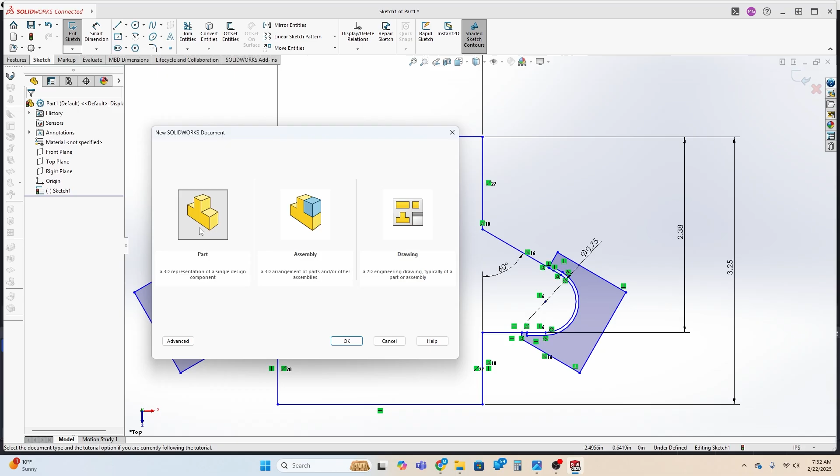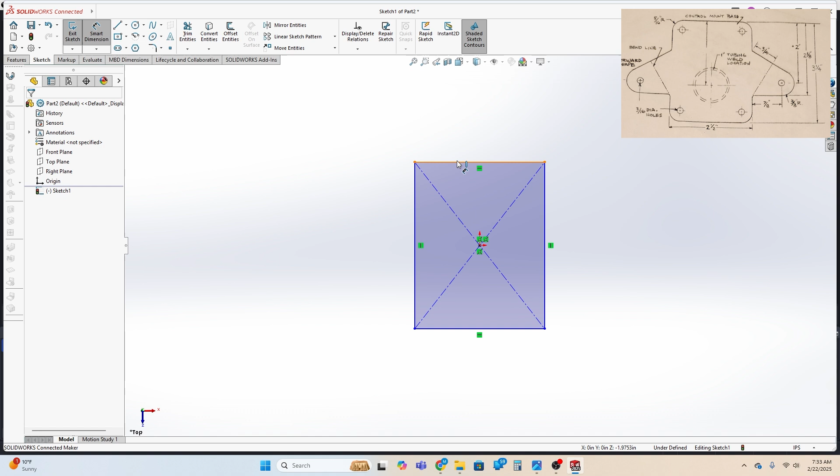A lot of cool stuff going on. You're going to see me dig into some of the back-end stuff that's not direct construction. This is SolidWorks, very cheap for builders, and in my case I qualify because I'm not using it for commercial purposes. I'm building the control mount assembly for the flight stick, for the actual control stick. This is kind of important right now because while the skins are off, it's easier to access where this is going to mount to the spar section of the aircraft, and part of that's going to go through the frame on the fuselage.

So to simplify my life a little bit, I wanted to get this done first. You would have seen videos of this before, except I've been learning how to use SolidWorks for the last 2 or 3 months. I've done a bunch of various brackets of varying sizes and whatnot. You can see some pictures throughout.

But this is the big one we're doing. Basically, it's just starting with a flat sketched image, then building the elements that matter. You can see that square right smack dab in the middle, the circle is going to be out, and I've got blown up on the top right of the screen the drawing that came with the blueprints I'm basing everything off of.

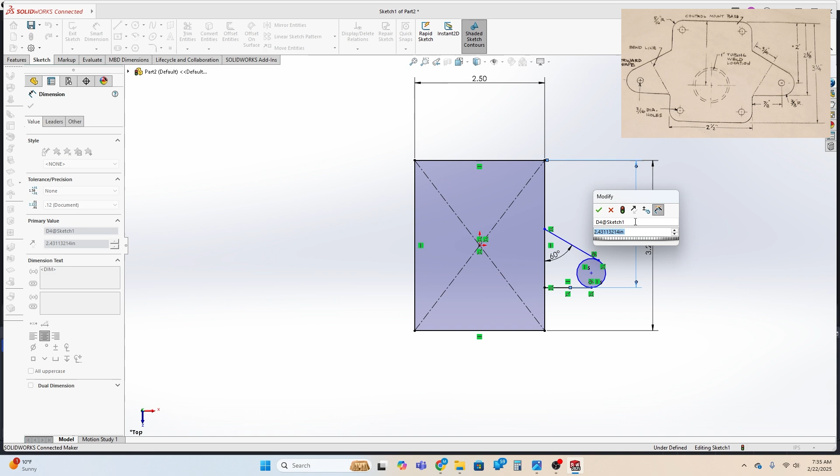So from there, you're seeing me do all the drawing and modifications that go with that. That device I'm using there is basically a measurement tool for dimensioning. It lets me put very accurate dimensions on parts to make sure everything's going where it's supposed to be, angled where it's supposed to be, mounted where it's supposed to be.

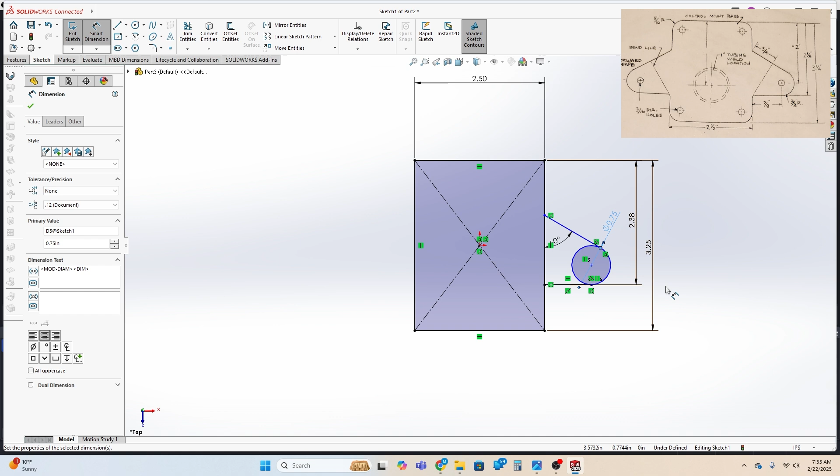It helps define the drawing very specifically so that when I put it into 3 dimensions, it's going to be very accurate with no errors, especially because once this diagram is done, I'm sending it off to Send Cut Send to have them cut the brackets for me. I'm not going to mess with it. I've technically already made some of these brackets, but I'm redoing everything in SolidWorks and sending it off to Send Cut Send because the quality is going to be infinitely better.

They have a precision brake built for what needs to be done in this situation. Since that's the case, it makes more sense to have them do that work versus me trying to do it on a 10-ton piston ram, jury-rigging a brake out of it and hoping it's all going to be accurate and precise, and that I'm not going to end up destroying my parts once I put them in there.

I don't have the ability to easily heat up joints to make sure they're soft enough to make the curves, especially with the 4130 chromoly steel plate I'm using. I don't want to mess with that when I don't have to. These services exist so I don't have to sit there with a grinder and a cutoff wheel trying to be an artist with a material I'm not very familiar with. I'm already trying to learn how to weld on this thing. Let's not reinvent the wheel if we don't absolutely have to.

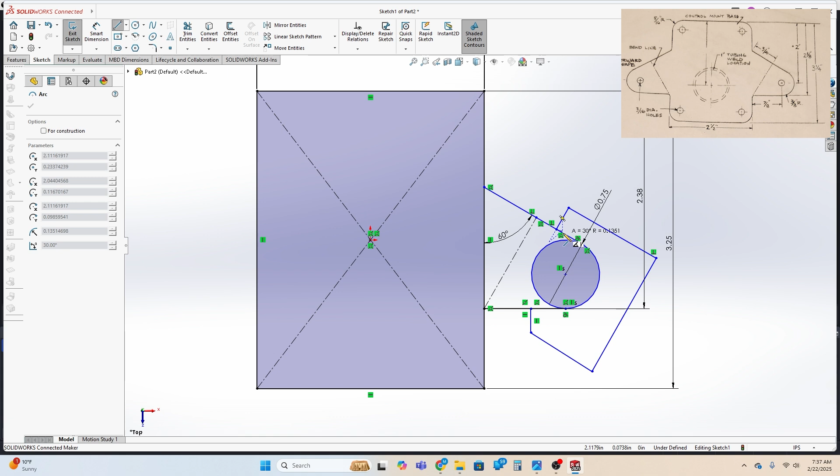This other piece here is something I figured out after I'd already drawn this part once and tried to submit it. This is a tab, so when you're actually bending on it, they need more material to bend on. They said it needs to be at least 1 inch long and parallel to the direction of the bend. That dotted line you see going up at about 30 degrees from north, that's our bend point, or pretty close to where it's going to be. So I needed to extend that tab 1 inch wide and far enough out. Then you'll see me draw in little connection points - they're break-offs for the tab.

Once this is done, I will cut off those tabs, remove the entire piece, and grind it down so they're smooth and flush, making sure they're nice and won't cause any issues. I just remove the tab after the fact once it's actually delivered. Super easy process to do.

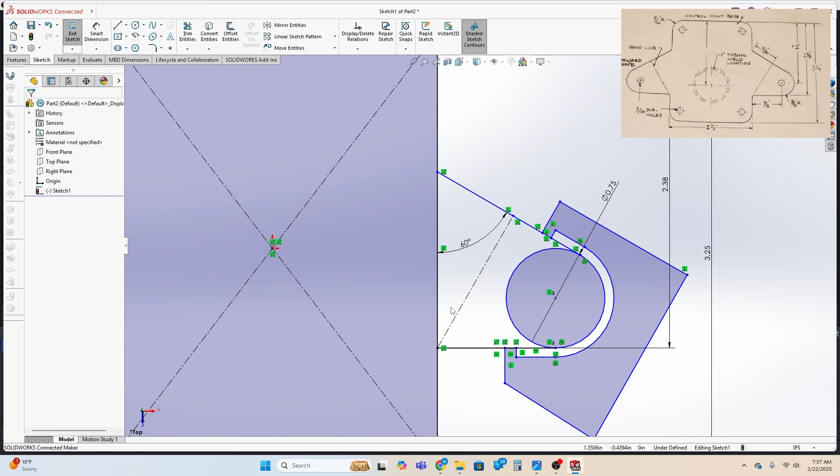That came from Send Cut Send, that I had to do it that way. I wish I didn't have to, but there's going to be a couple areas that will need a little attention when this is done, but not the end of the world whatsoever. So that's that segment right there.

From there, I just need to add the extra dimensions for the bends to make sure this thing's going to be accurate. Once this becomes a 3D model, we need to be able to bend it to the proper shapes too, and all that's going to get done in SolidWorks. By the end of this part, you'll see that happening.

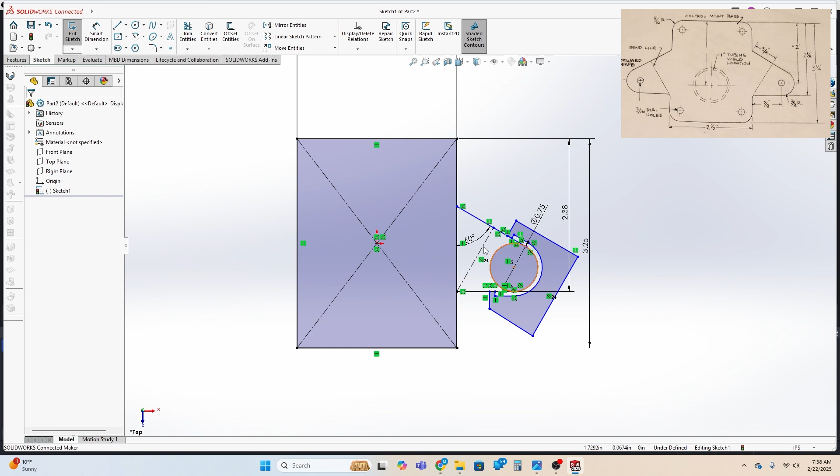So that's kind of how this whole process works. This whole thing has been dimensioned basically to this point. Now I just need to duplicate it on the left side, because you can see from the drawing it's supposed to be identical and symmetrical on the other side.

So I need to draw this center line point, that dotted dashed line going top to bottom that I just added. That's our mirror point, dead center on the bracket, and we hit mirror on that.

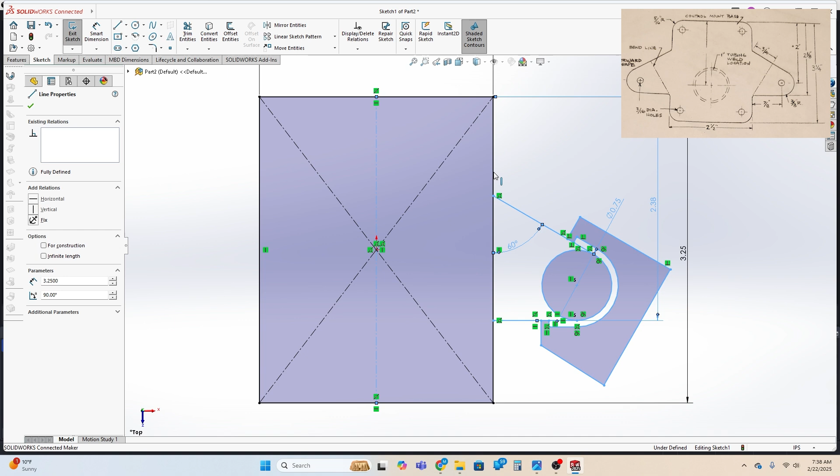Once all the right components are selected—and I'm working on that right now, there's a ton of objects in here which can kind of cause some issues, and that's where I'm messing with that too right now—it mirrors it over just like that.

In order to make this one solid flat drawing, I've got to do exactly what I did there and remove all that, and then I need to remove the tab components as well here. You're going to see me zoom in here in a moment, because unfortunately right now it is not a single solid entity. I need to go in and actually get close to those tabs and remove those.

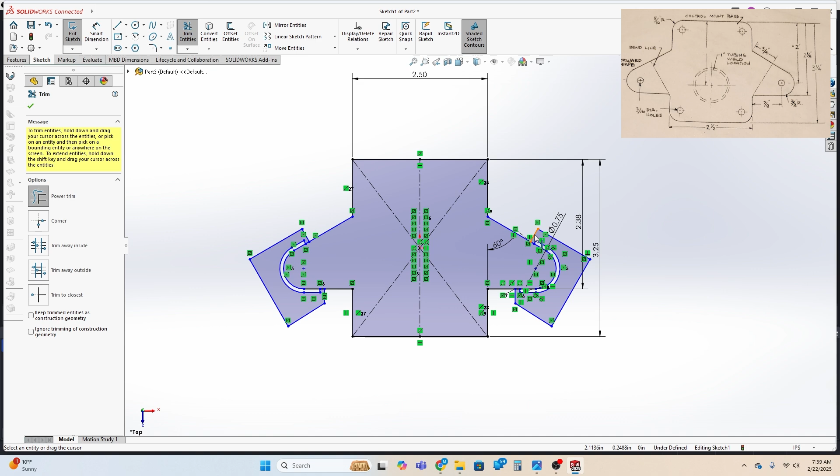Right there, you see me doing it—or trying to. I need to get a little closer because they're small tabs. But once those are all out, boom, you now see the solid geometry, and from here I can actually go to the sheet metal tool.

Oh, before I get to the sheet metal tool, that's right, I drew the circles out here. Those are going to be the actual screw holes for everything else for the mounting. That's going to be what actually mounts the control arms to those two little brackets. There's going to be control lines attached to that stuff.

The holes that I'm drilling right there are going to be for the physical mount to the spar. Once those are dimensioned and taken out, that'll get mounted directly to the spar. I'm drawing them now because when I make this thing in 3D and turn it into sheet metal, it'll actually remove those segments, so it simplifies that.

Each of those is 0.187. I think it's 3/16 of an inch. They're all 3/16 inch holes.

You see me having to dimension decimally. I wish there was a way to do it with fractions, but if there is, I don't know what it is, so I have to learn the numbers. I've memorized some of them, but usually I have to break out the old calculator to make sure they're all square and proper.

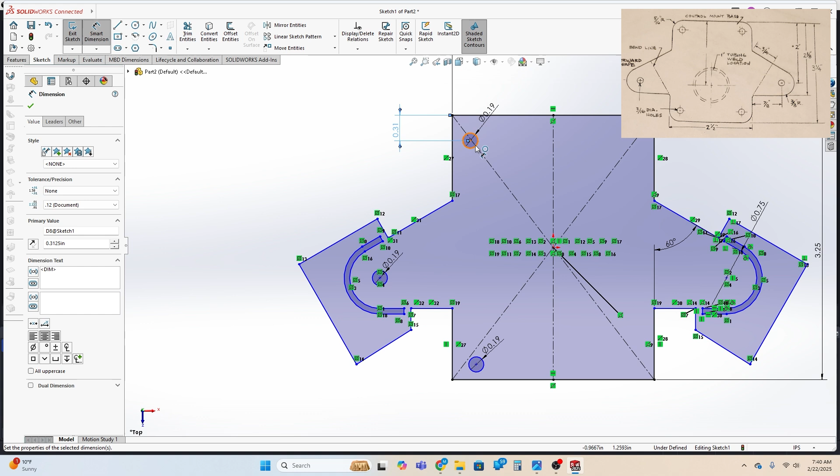Once all three of those are drawn out, we'll do the same thing we did when we copied the geometry from the right to the left. We'll copy the locations and holes from the left to the right using that exact same mirror function in SolidWorks. As you can see, this is very precise, but the nice thing about that dimensioning tool is you can get this stuff very, very accurate, so you don't have to worry about any guessing games. When these get cut...

Because Send Cut Send is a laser cutting service—beats the heck out of me with a hand grinder—they're going to be very, very accurate. So there you can see that with that mirror function, it duplicated those circles exactly where we needed them to go.

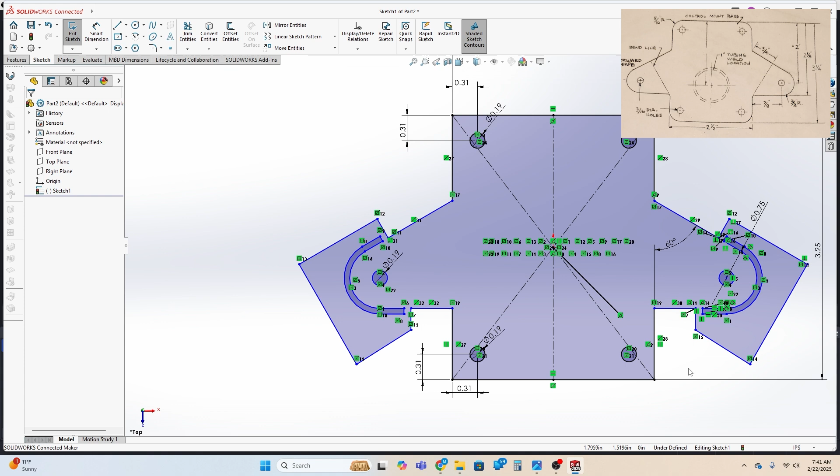So part of this is just checking to make sure everything looks good, and the whole solid is selected the way it needs to be. From there, I use the sheet metal tool and make it the thickness I want. In this case, it was supposed to be about 0.12 something.

The next closest size was 0.125 thick chromoly steel. So that's it right there, getting the dimension set, and there is the flattened laser cut part. That's what it's going to look like initially, before the bends get put into place. Before I can put the actual bends in, I need to do a couple more features on this.

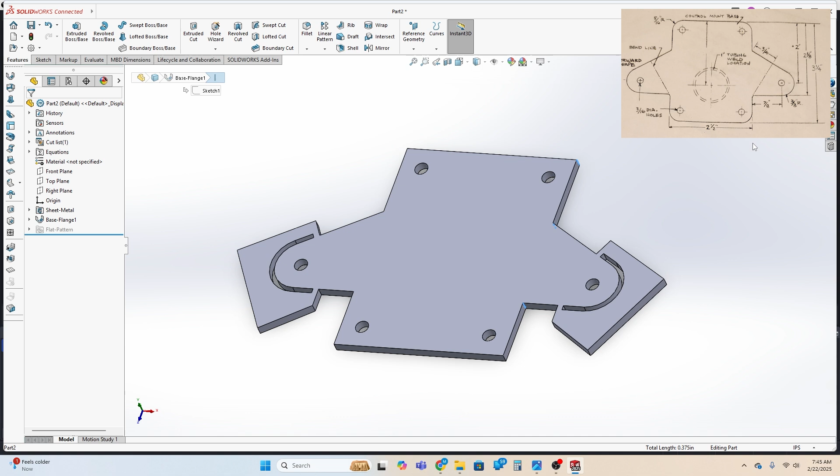As you can see in the drawing, there's curved corners as opposed to sharp angled points. We're going to address that here. So you can see me selecting each of those corners, and then I'll put a fillet in and add those arcs. Those are a little small for that drawing, so you'll see me go in and change the radius on these momentarily.

That should be happening right there. I'm just extending those radiuses a little bit, smoothing them out, cleaning them up, along with the interior radiuses. This is also going to make life on the bend itself a little easier, because it's actually going to extend the bend a bit into those tabbed wings as opposed to putting it right against the corner.

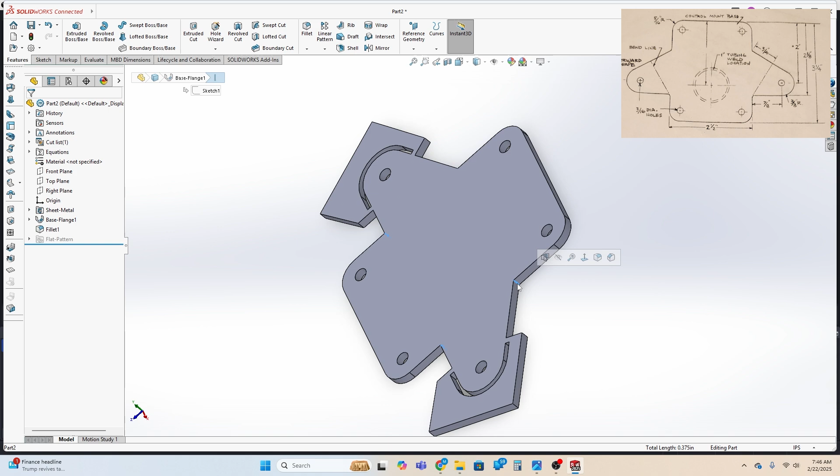If I did it right against the corner, there were going to be issues with deflection from the rest of the part, because it would be in the way and there'd be no good way to make that bend right into that corner. So once I get these fillets done to the right size, since these are supposed to be about 1/8 inch fillets...

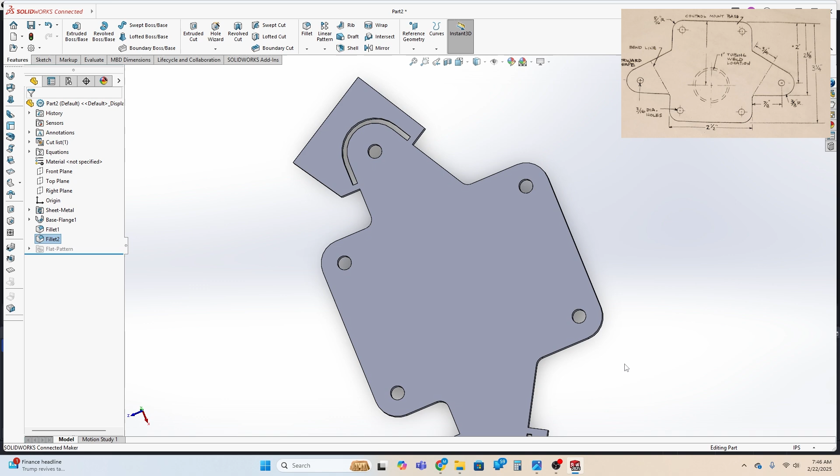That'll shrink that up, and then you'll be able to see where I put my perpendicular lines when I move back onto the flat face. So far this is the gist of what you're looking at - you're seeing the bend portions. Now we're just switching back to that top view so we can draw back on that face.

So we'll go back to sketch mode, click on that face, and start grabbing some corners to draw the bend lines. We're not going to use the very corner, we're going to use that slight offset right at the edge of the curve there. That's going to be our best bet for getting that.

So we just push it, and those yellow lines that light up when I brought it up to the perpendicular show exactly where that perpendicular is. So I stick that point right there, and that's where those lines are now drawn on this topmost face.

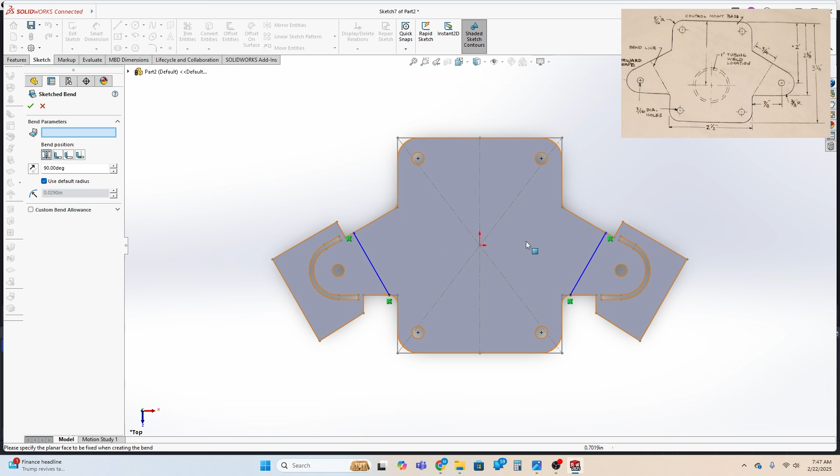From there, I go back to the sheet metal tools, and here I can select those bend marks - which is exactly what those are - and put the appropriate bend location on it. There's a holographic see-through image of what that bend's going to look like once it's done. At this point, that's pretty much exactly where I want it to go.

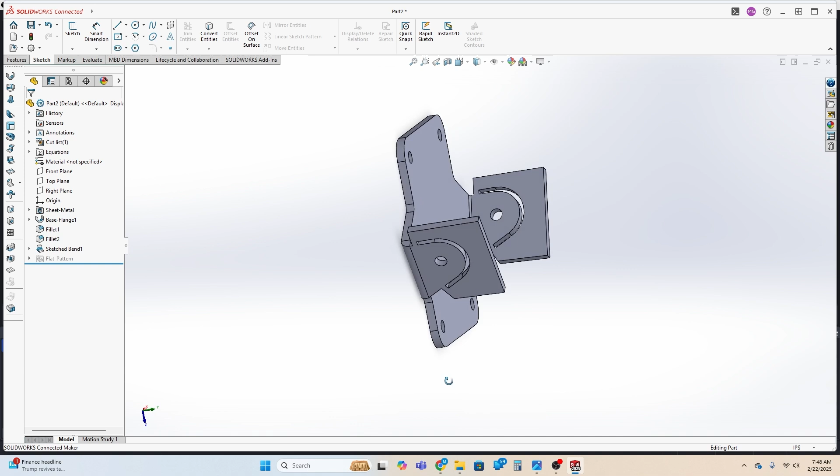Now all I have to do is select it and make it a permanent step by hitting that little green check at the top left, and boom, I have a 3D model done with bends, and that's what she looks like. So I'm going to do another one of the brackets here just because why not.

We're here, I recorded it. Might as well use the material so you can kind of see what I did.

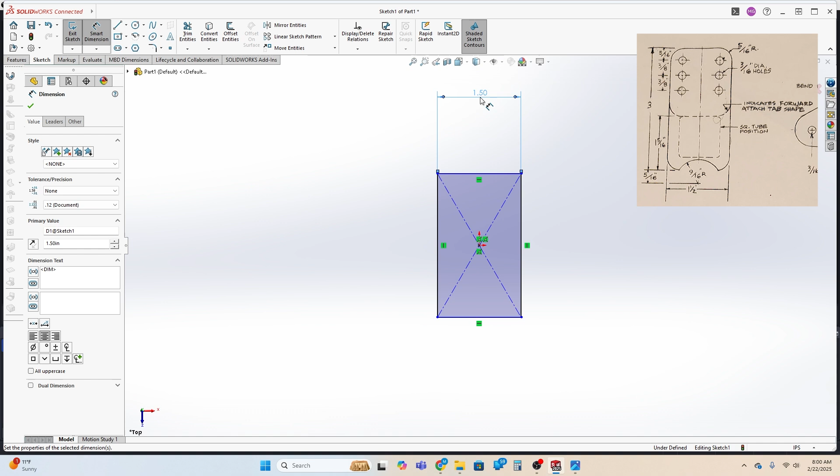It's one of the brackets that's going to weld to that control mount. It's another rectangle shape, you can see it at the top there - that's actually two separate brackets. There's a 3D image I didn't include in this one, I'll show it to you sooner than later. Plus it's going to get welded up in the next couple of weeks, so you'll see it firsthand. It's actually going to be the larger of that rectangle.

So you can see it's the tall, lengthy component of it. The dotted lines are the optionals. So in this case, it's going to be one solid bracket, top to bottom.

Start out with that rectangle. Make sure I define all of that good jazz. Get those circles put into place. They're going to be on the left side, and then again, like before on the previous tool, we'll mirror those over. Cut those the appropriate side.

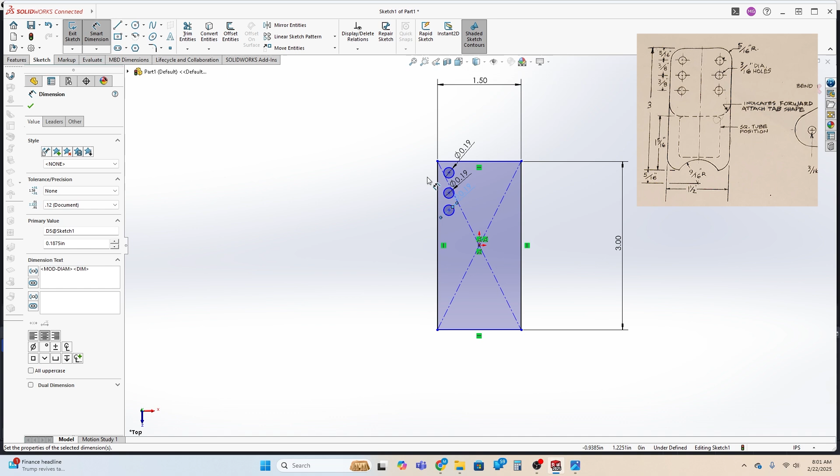Each of those, I believe, is a 3/16 diameter hole. So those will each get cut and then spaced appropriately. You can see that on the drawing as well.

5/16 from the top edge, and then 3/8 and 3/8 between each of them. Right now, the diameters are on point. Now I just got to get the spacing down. So that's what we're doing right there, is getting it even off the edge, and then breaking those down 3/8 apart from each other.

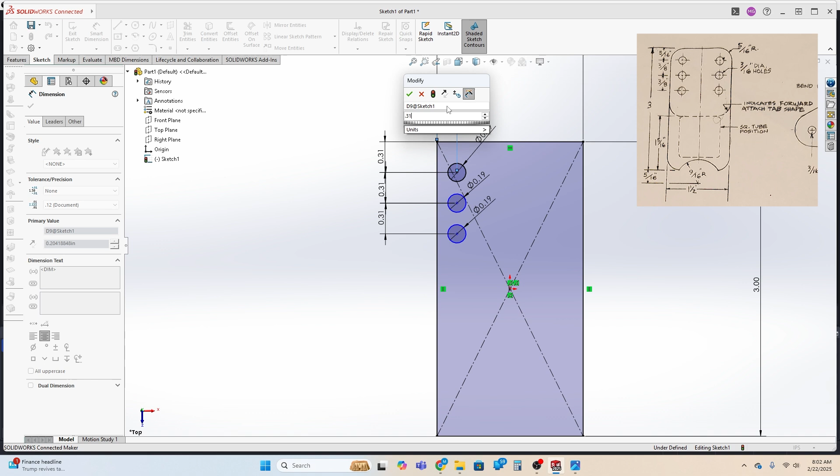At this point, I think I actually have the wrong number in, so I'll make that correction here momentarily. Because it's 5/16 from the top one, and then here you see where I make the correction and realize, oh, that's not right. 3/8, 3/8 instead of 5/16 off the top. So those are each getting corrected right here, and that fixes that particular problem.

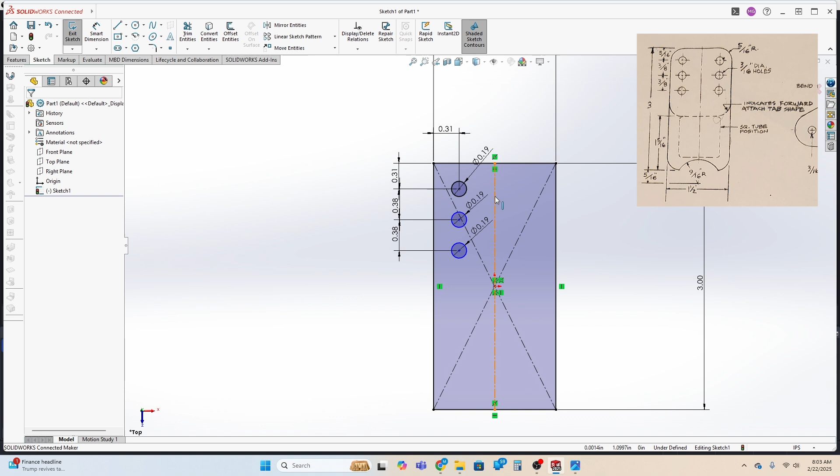From there, that's just the center line, because I need that to cut the mirror. Or reflect, I should say. Not cut the mirror, but reflect those 3 holes onto the other side here.

This piece is a lot easier to put together than the first bracket. I think this one only took about 7 or 8 minutes to actually do the whole thing top to bottom.

This is making it a sheet metal, and it already pre-drills all the holes. That was the perk to doing the holes up front and getting those circles put onto the flat sketch.

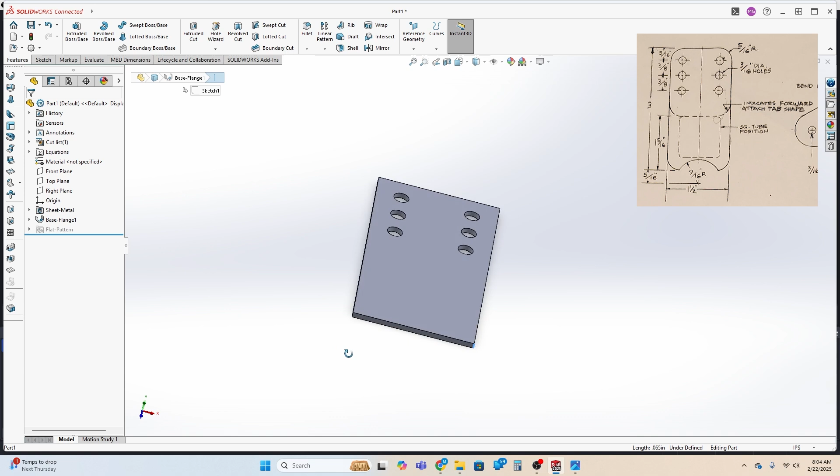From here, it's just adding those fillets on each of the corners to make sure we have the right angles and diameters. In order to cut that arch on the very bottom, I actually need these fillets in, since, as you can see from the drawing, they match with the edge of the fillet perfectly.

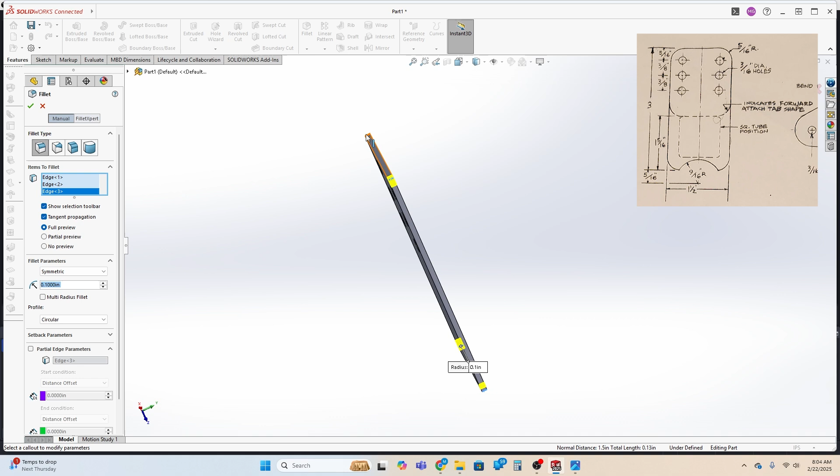So once I get those drawn with a 5/16 inch radius on all 4 corners, what would they go from there? There is a way to auto-select all 4 corners. I couldn't remember for the life of me what it was. I'm sure I'll figure it out here over the next couple of days and weeks.

But right there, it's drawn in. Of course, I think I only did 1/10, so I had to remove that and do it over one more time. So my apologies on that. But you're getting a very minimally edited variation of this video.

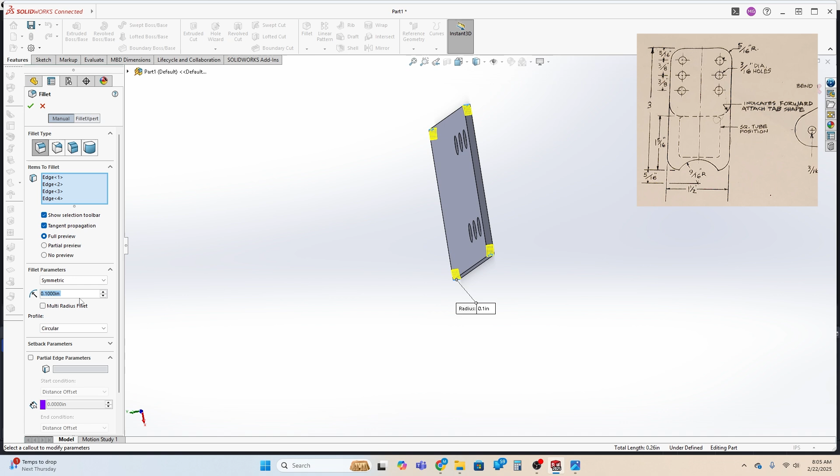But we do that fillet again, and then we actually put the right radius in it now. There we go. That actually looks like it was done properly. Let that actually cut. Hit the check mark to ensure that and save it. Perfect.

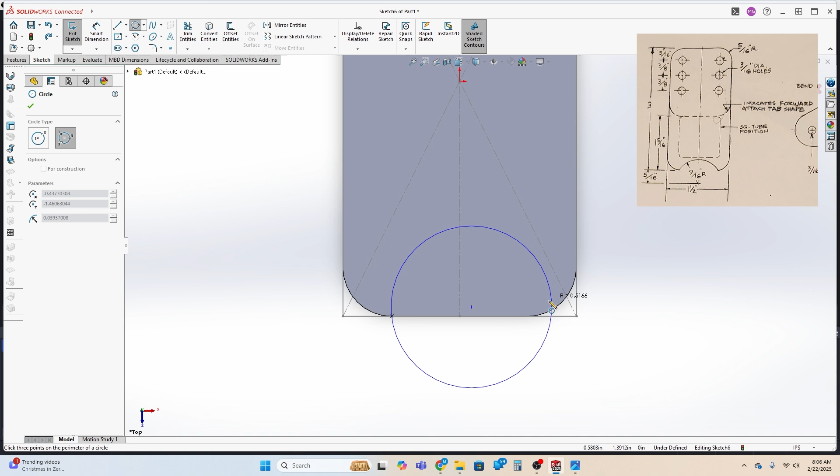And then change from that orthographic view to a top view by going back to sketch mode. And now here's where we have to draw that circle section, that segment. So basically we're just going to use it to draw a perfect circle with that 9/16 radius that's listed.

So we can do a 3-point circle like that. So we basically put the endpoints that need to be fixed and then have that floating one, and then just use the smart dimensioning tool to set the radius where you want it to go.

So it does diameter, so obviously it turns into, instead of 9/16, it's 9/8. No big deal, just got to do the conversion. I just got to figure out where I wanted to put the angle on that. I get a little twitchy that way.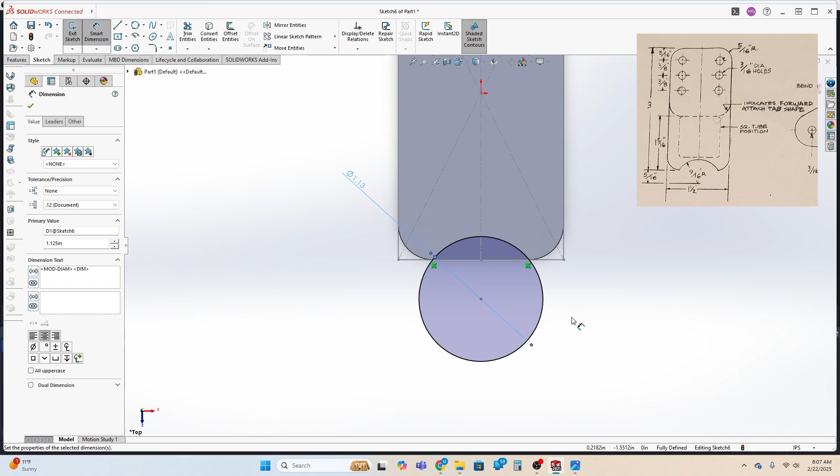Once that's defined, then now it's just a matter of doing an extrusion cut. That's in the features menu. Once there, I switch from doing blind to through all. So it just does a completely perfect cut right through the entire thickness of the bracket.

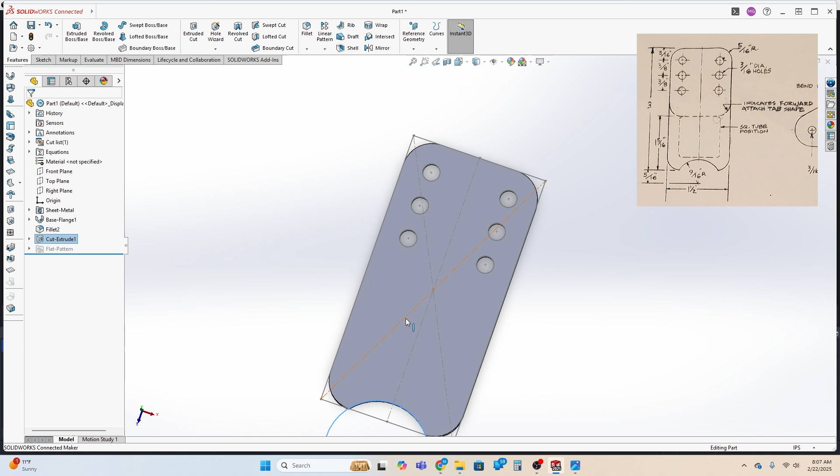Once that's done, you're looking at the completed bracket at that point. So now we can just take a look at it, spin around in circles a little bit, and there you go. Final completed bracket. Thanks everybody for tuning in, and there will be another video next week, hopefully.